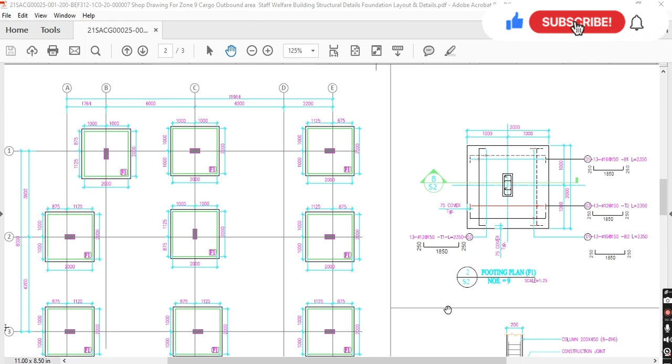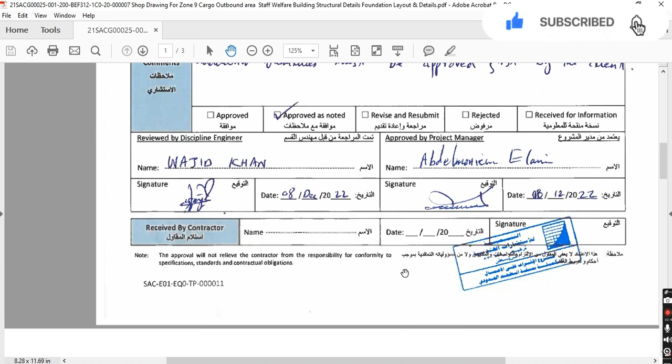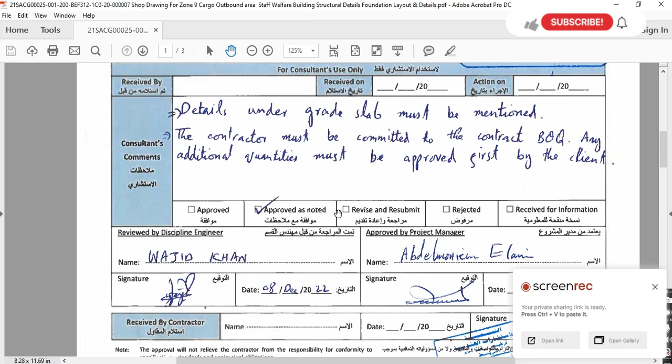So guys, whenever you are going to start to study shop drawing or check the shop drawing, first you have to know whether it's approved or not. How you will know? You have to check the submittal form for the shop drawing. Like this is approved, approved as noted. Here you can see some general comments from the consultant, so they write approved as noted. Approved as noted means approved with comments.

So guys, after that you have to come to the general notes of the drawing. Here you can see in general notes all dimensions are in millimeter unless otherwise indicated. The drawing must be read in conjunction with architectural and other engineering drawings. The compressive strength of the concrete will be 35 MPa. Steel yield stress for reinforcing bars is 420 MPa and it will be grade 60. Bearing capacity of soil will be 150 kN per square meter.

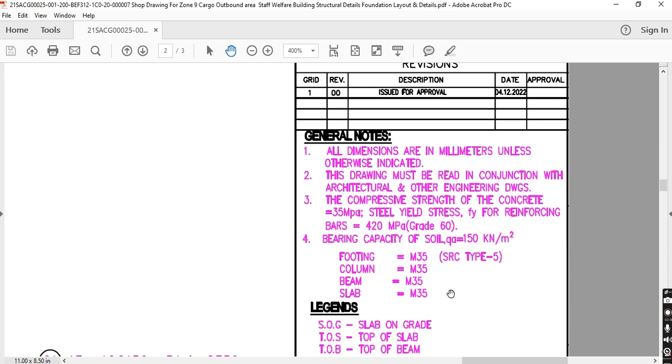Footing. For the footing we will use the SRC type of cement. We are using the SRC type cement where the concrete has contact with soil. So the concrete for the footing will be M35, column will be M35, beam will be M35, slab will be M35. It means that all the structural concrete should be M35. M35 and C35 are the same thing, but in our project here we call it C35, and these are the drawings from our other projects, so they called it M35 there.

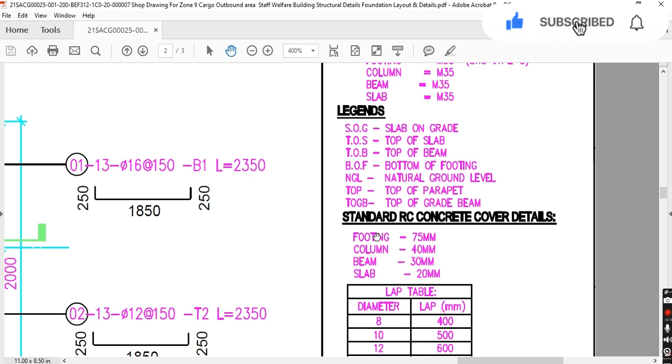Legends are abbreviations. So SOG slab on grade, TOS top of slab, TOB top of beam, BOF bottom of footing, NGL natural ground level, TOP top of parapet, TOGB top of grade beam. Standard reinforcement concrete cover detail. For the footing the concrete cover will be 7.5 cm or 75 mm. For the column 40 mm, for the beam 30 mm, for the slab 20 mm.

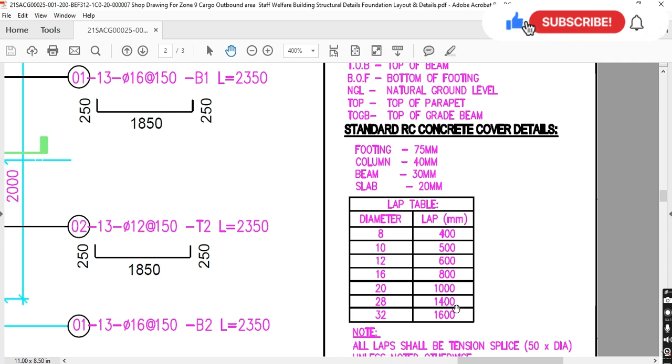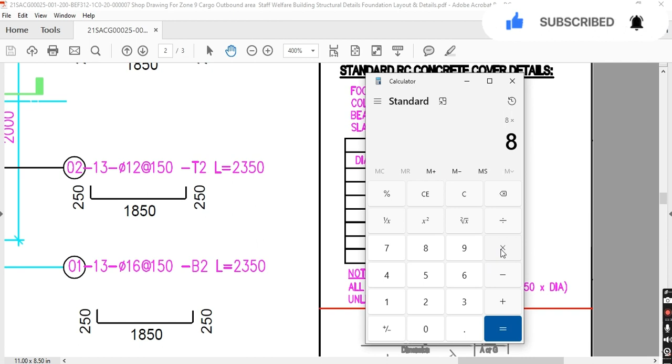Lapping length for the different bar diameters, and this is the lap in millimeter. For the 8 diameter bar 400 mm, for 10 500 mm, for 12 600 mm, for 16 800 mm, for 20 1000 mm, for 28 1400 mm, for 32 1600 mm. How will you find the lapping length for the different dia bars? So here they show you. All laps shall be tension splice, 50 multiplied by diameter. So here you can see, 8 multiplied by 50 is equal to 400. So you have to multiply the diameter of the bar by 50, and you will get the lapping length.

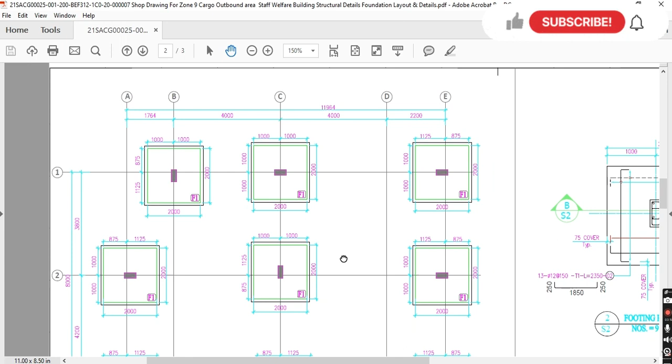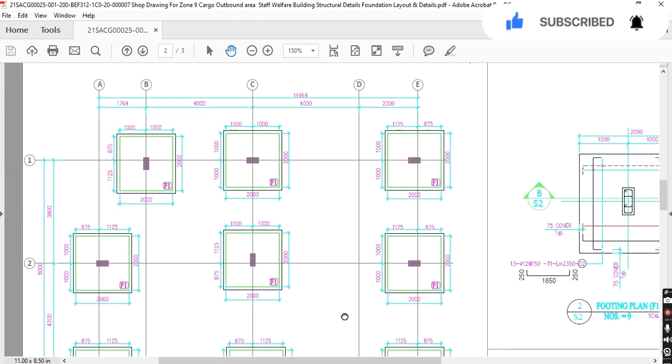After that, when you study the general notes, then you have to come to the foundation layout. This is the layout of foundation or footing. In this zone 9 building we are using all footings with the same detail, so they call them F1. Here you can see dimension 2 by 2 meter footing. All footings are 2 by 2 meter. So from here you can mark the location for the inspection. When you are submitting the drawing for the inspection, you have to highlight the footing where you are going to conduct the inspection, so it will be easy to find the location of the footing. From the layout you will get the location of the element, the dimension and the name of the footing.

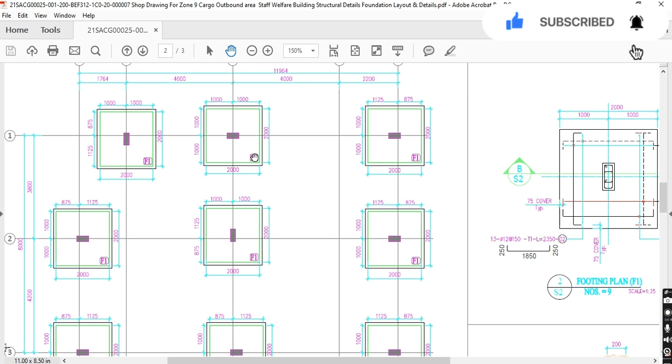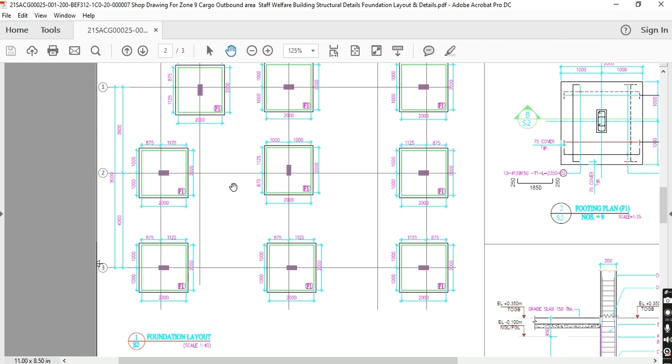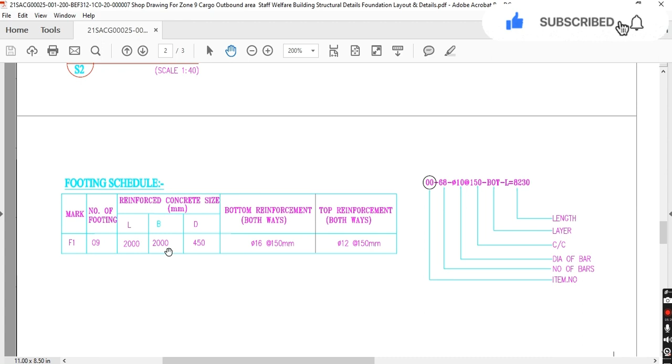So after that we have to go to the bar bending schedule. This is the bar bending schedule. So for zone 9 building we are using all footings with the same detail, F1. Number of footings is 9, I will show you. 1 2 3 4 5 6 7 8 9, 9 footings we have in the zone 9 building. Number of footing 9. Reinforced concrete size. Length of the footing will be 2 meter. Breadth of the footing will be 2 meter and depth of the footing will be 450.

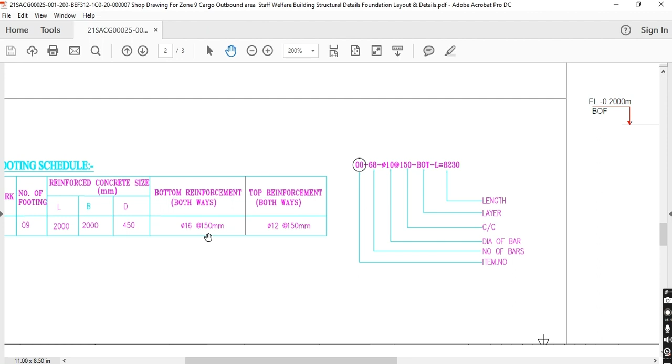Now bottom reinforcement both ways. The steel which we will use for the bottom reinforcement is 16 dia bars. 16 dia bar will be used in the bottom reinforcement of the footing, and the distance between two bars will be 15 centimeter. Top reinforcement will be 12 dia bar and the distance between two bars will be 15 centimeter.

Here this is the most important part. If you study this part, you will study the section easily. So here this part is representing item number, this part is representing number of bars, this part the diameter of the bar, this part the center to center distance between two bars, this part will represent the layer, bottom, and this part will represent length.

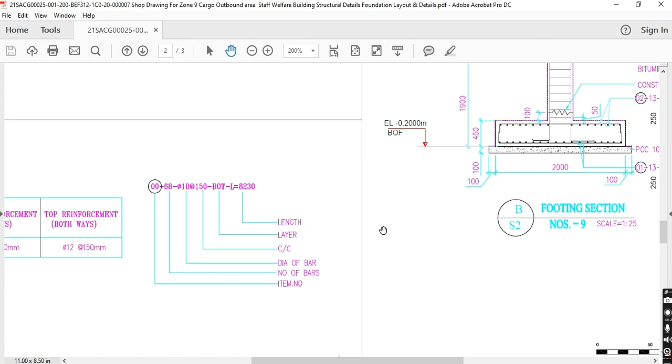So after studying the bar bending schedule and these general notes, we will go to the cross section. You have to use this footing section to execute your work. This is PCC, or plain concrete, or lean concrete. Before this, here we have compacted soil. The soil should be compacted to a minimum of 95%, and each layer will be 25 to 30 centimeters. After that you have to spray the pesticide.

After that you have to provide 250 micron plastic or vapor barrier, and after that you have to do the PCC, which will be 10 centimeters thick. When you complete the PCC, you have to start the reinforcement installation. So here you can see 16 diameter at the rate of 150 mm for bottom 1 and bottom 2. Bottom 1 and bottom 2 means we have bottom steel in the footing in both ways. One way is called bottom 1, the other way is called bottom 2.

So the bottom steel will be 16 dia bar. The distance between two bars will be 15 centimeters, and this is the shape of the bar. So you have to cut the steel in this shape. This part will be 25 centimeters, this part will be 25 centimeters, and the length will be 1.85 meters, and you have to install this. This is for the bottom.

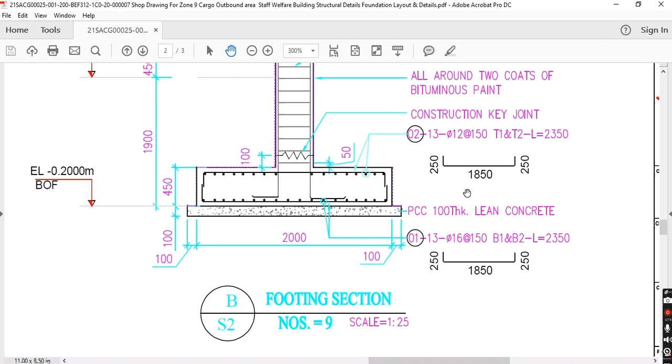Now this part is for top 1 and top 2, the top steel of the footing. Here you can see both reinforcements are the same, but here the diameter is 16 and here the diameter will be 12, with the same distance between two steel bars. The total length will be 2.35. When you add these numbers, you will get this length. So the length of the bar will be 2.35 meters.

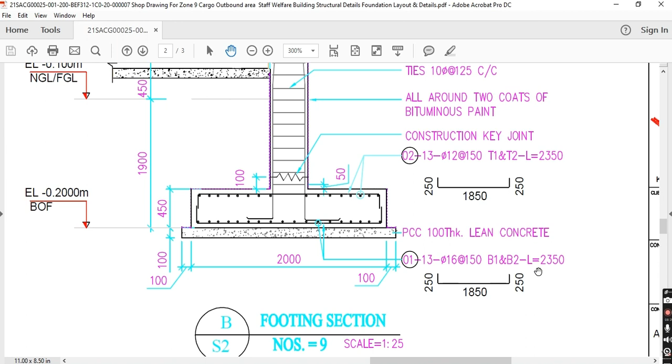When you complete the concrete, here you can see you have to provide bitumen paint, 2 layers, and this is the construction key joint. How will you do that? When you complete the reinforcement of the footing, you also have to provide the steel of the column here. So you have to provide the neck column. We also call it neck column, the steel of the column.

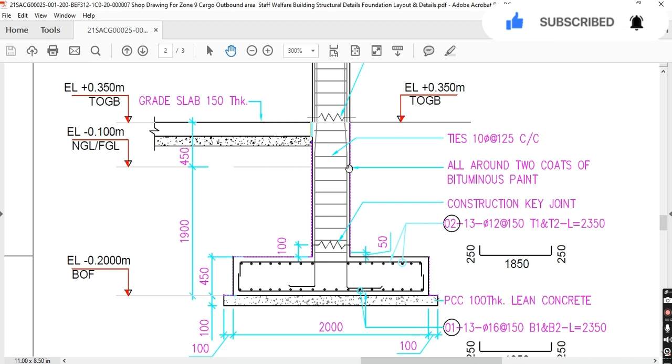After completing the reinforcement, you have to cast the concrete. So you have to provide the construction joints. Sometimes in Aramco projects we were chipping this area. When you chip this area and complete the steel for the column, when you are going to cast the concrete for the column, in this area you have to provide bonding sealant or bonding agent, and this will be a rough, chipped area. You have to chip here to make it rough to get a strong bond between the two concretes.

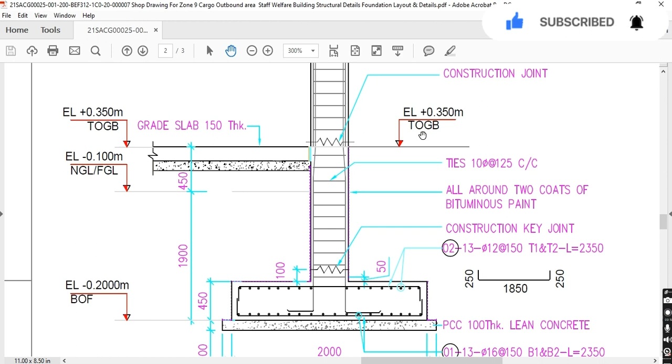Now here, all around, 2 coats of bitumen paint. Ties of the column will be 10 mm diameter, and the distance between two tie bars will be 125 mm or 12.5 centimeters. Here will be the top of grade beam. After that here will be the grade slab, and the slab on grade thickness will be 15 centimeters. Now this is the thickness of the footing concrete. This is the thickness of the PCC.

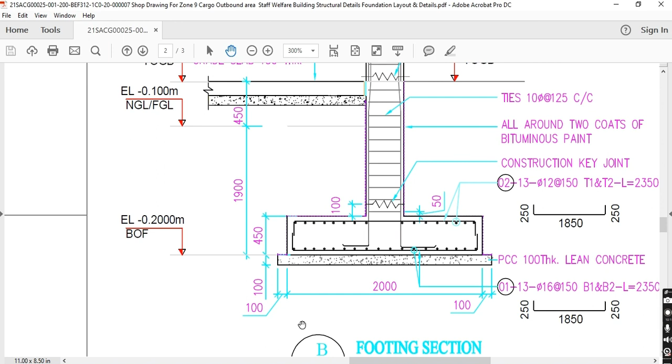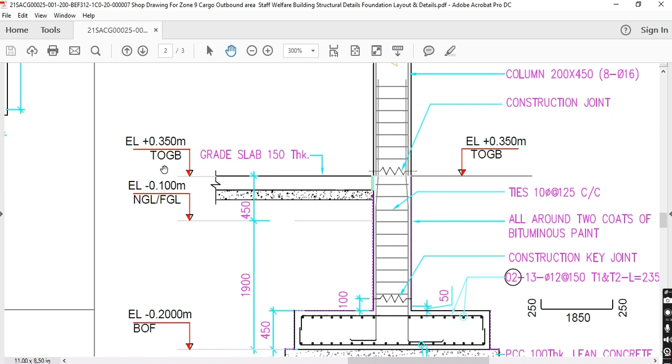Here you have to provide approved soil. Here you can see the distance is 10 centimeters from here. This is the PCC. The PCC should be more than the dimension of the footing. Bottom of footing, this is the level for the footing. NGL, natural ground level, or finished ground level. Top of grade beam. And here will be slab on grade. After you complete this one, you have to make the column, the structural column.

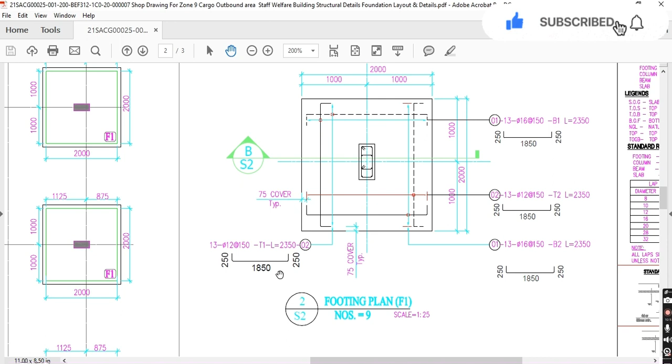This is the footing plan. Here you can see the footing plan. Top one steel, and this will be the bottom two steel, the same as I told you in the section. Here the top two steel, you have to provide it in this area. You can see these are the top two steel. And here you can see the bottom one steel. These will be the bottom one steel.

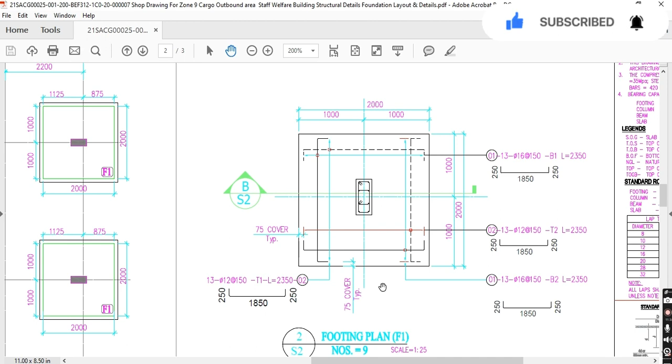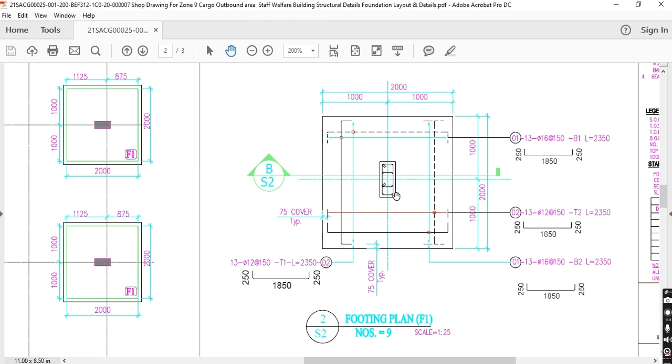All the details mentioned here are very simple if you study the general notes and the shop drawings properly. Dimension of the footing, 7.5 centimeter cover, everything is present in the shop drawing if you study it properly. And this is the column. Here is the footing and this will be the column. Here you can also see the column stirrups and bar details very easily. So guys, I hope you will now be able to study the shop drawings of footings at your site very easily without any confusion.